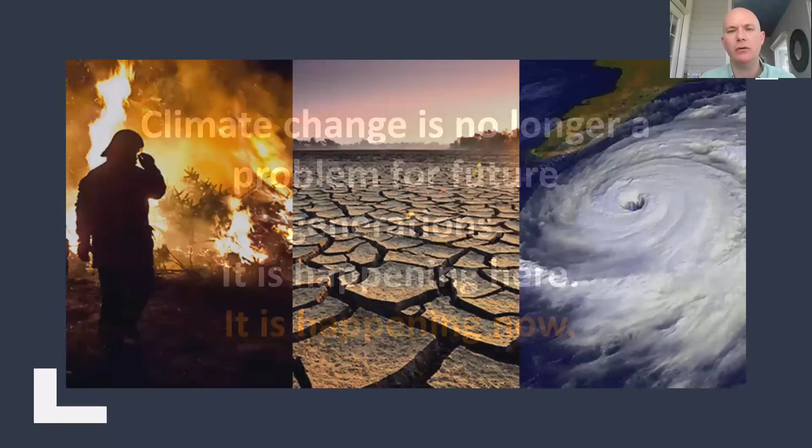This is really about addressing what we've seen as one of the emerging trends in the industry right now, in the built environment. For right now, I think we're going to start this conversation by focusing on setting out the problem. Strangely, as many of you might have felt the change in the United States or wherever you might be sitting right now, when I began giving a version of this conversation a couple years ago, there was a lot more need to spend time talking about what's really going on with climate change right now. I think you can pretty clearly see from your anecdotal interactions with other folks that the question of if has changed tremendously.

There may still be holdouts talking about the why and how things are changing. But where I think that has really changed in terms of the conversation around climate change is it has moved to a personal place. It's one thing to be talking about parts per million, and I certainly would be remiss if I didn't bring in a graph that talked about that here in just a moment as well. But where this has really changed is that the conversation around climate has moved away from statistics and has started meeting people where they live.

I think that's what we're seeing when we consider the effects of climate change in the forest fires we're seeing out west, because there's extra fuel load from pine beetles not being killed off, and it's claiming many trees out there that just add to the severity of those kinds of situations. The droughts that in many ways helped to spur the conflict in Syria, exacerbating poverty and concentrating people in cities and growing very restless over their circumstances in those situations once again.

I think it's really becoming pretty apparent from the level of tropical weather that we're encountering even here in the Southeast, that more than 50% of the recorded Category 5 hurricanes have happened in the last 30 years. That starts to give us a little bit more of it, then I think even regular folks are starting to recognize that something is different, something has changed.

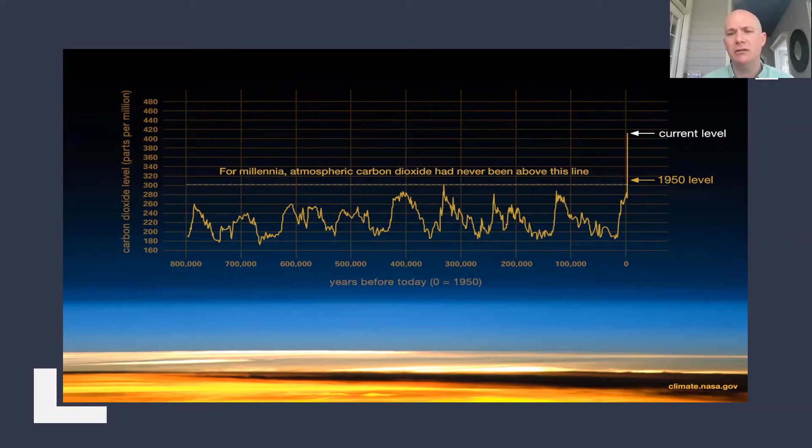We are truly in uncharted waters with regards to the climate and its resiliency. Certainly something to take a moment with to think about there.

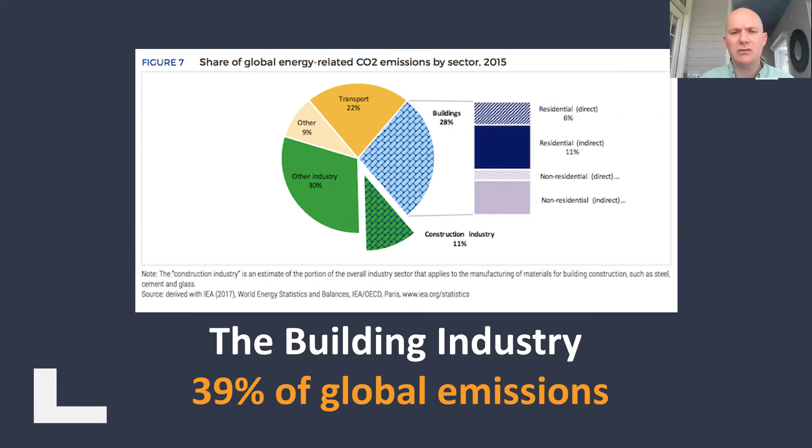So in reality, if you were to start in a place to truly look at the biggest opportunities, the lowest hanging fruit for addressing climate change, the building industry is certainly still ripe for opportunity there. And you kind of want to take a moment to ask the why of this.

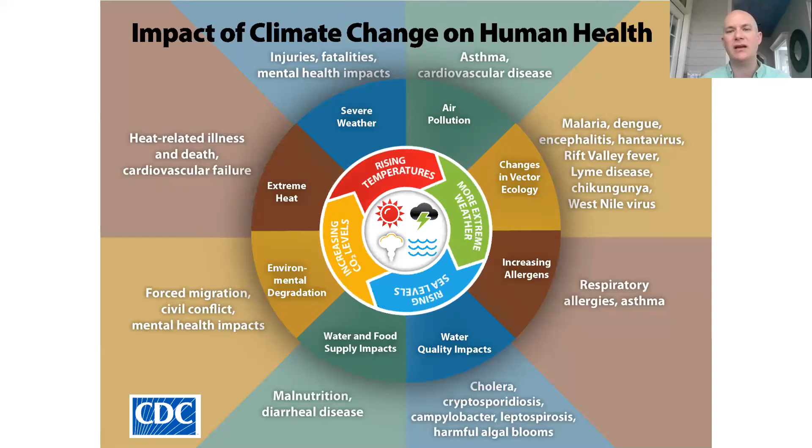As we address the elements within the building industry, I think it's important to break this down. Many of you probably have a great concept of this already, but it's important to remember that operational carbon is, for folks who use this parlance, your scope 1 and scope 2, the direct use of energy that a structure, a building, a car, or a hairdryer, anything that plugs in, the amount of carbon related to its use of energy.

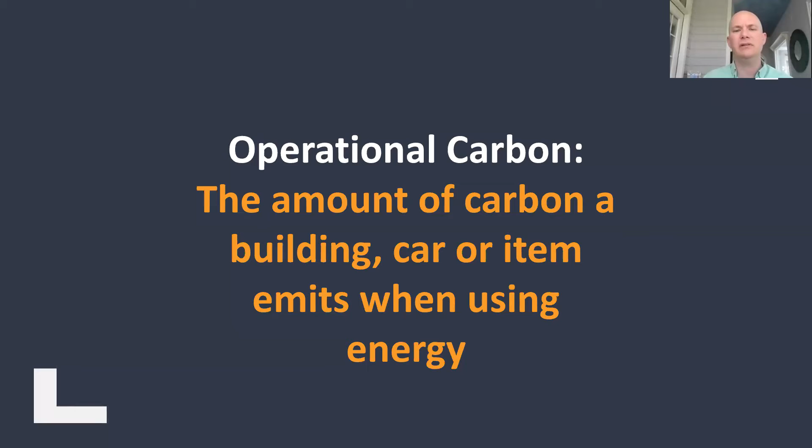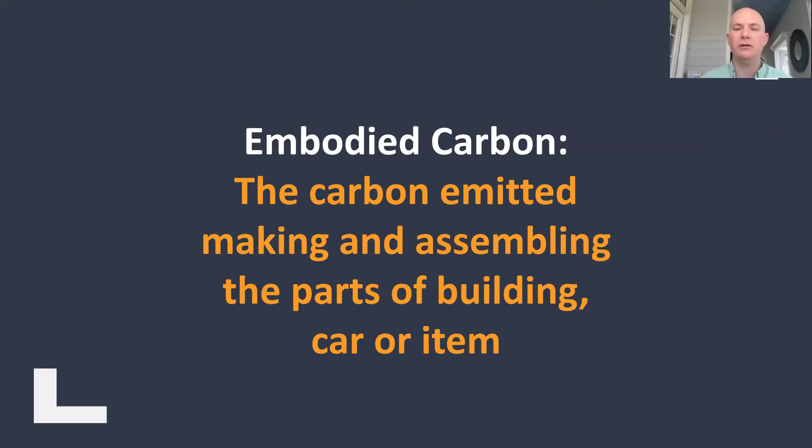That's operational. But embodied carbon is the carbon emitted while making, assembling that building, assembling that car at a factory, or crafting your phone or something along those lines. An amount of energy was used, and some of that energy likely used a carbon-burning source to create it. So those items have energy associated with climate change built into them. That's our concept of embodied carbon.

For a very long time, honestly, with the beginning of LEED, as many of you would be familiar, so much of it was focused on tracking emissions from building operations. And there's a good reason for that. It was the way we could measure change. It was the place we could go directly to users and owners of those structures and say, here's how we can do right for your wallet as well as for the environment by using less energy.

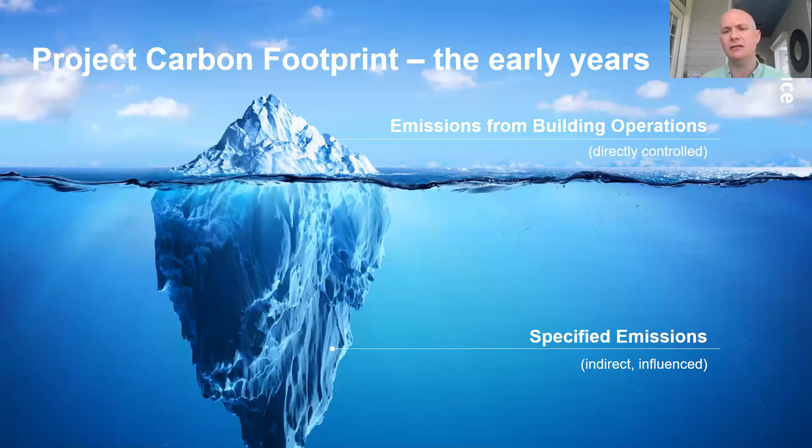While that is absolutely a valid way for us to consider efficiency, what is just now really starting to come to light is the iceberg analogy here—the specified emissions, indirectly influenced by what you're purchasing, and the emissions associated with making those materials.

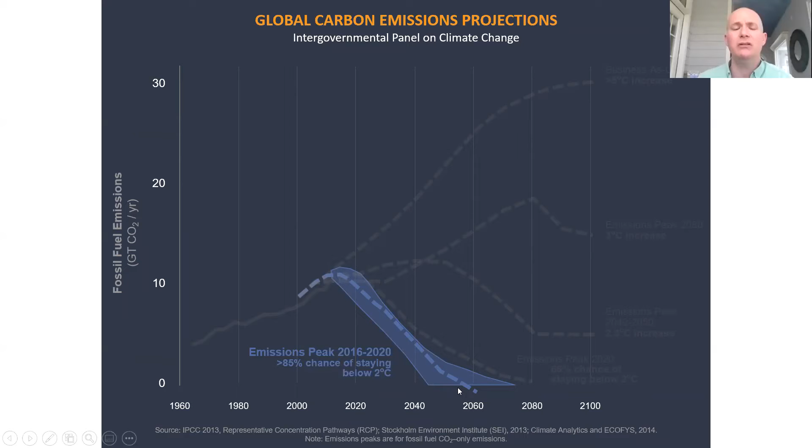As we go back and start thinking about these materials and embodied carbon as a solution to avoiding the worst effects of climate change, it highlights the path we're seeing here about peaking our emissions somewhere around now. Obviously we're past 2020, but if we're able to do it, we have a very good chance of avoiding the very worst influences and impacts of climate change.

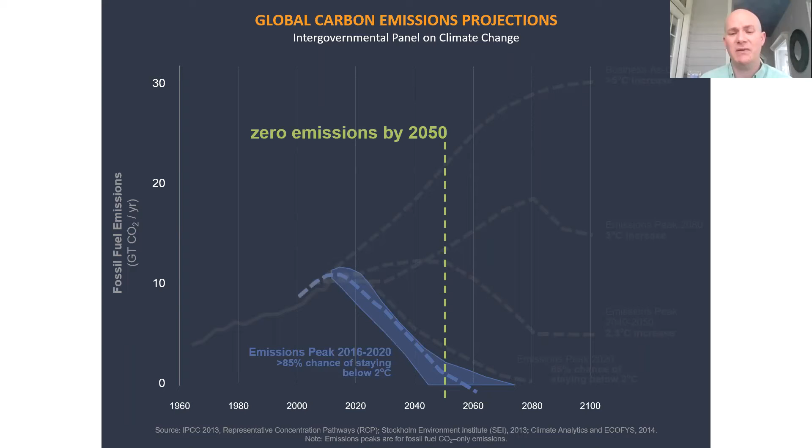What that really implies is essentially reaching a zero emissions target by 2050. There's an old saying that essentially says shoot for the moon and land amongst the stars even if you don't make it. But at the same time, the pursuit of a zero emissions target by 2050 ensures the best opportunity for our species, not to put too fine a point on it.

So with 2050 as our target for zero emissions, whether within the building industry or simply the aspects we can control, it really presents a window of opportunity. It's important to think about the building projections from the Paris Climate Accords and the levels of growth we can anticipate over the next 29 years—we're essentially going to be building 2 trillion square feet of new and renovated structures.

That's a lot—too much to really wrap our heads around. But this comparison helped bring it home for me: 2 trillion square feet represents essentially building New York, all 5 boroughs, once a month for the next 29 years. That is a lot of materials—a lot of concrete, a lot of steel, a lot of glass, a lot of carpet tile and other finishes you might find inside those spaces.

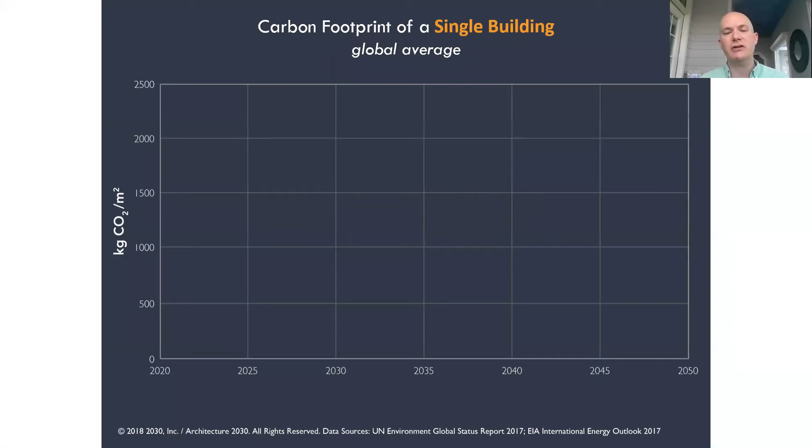So let's ask the question: what is the carbon footprint of that much stuff that we can anticipate being built between here and 2050? Taking a global average, you've essentially got your embodied carbon footprint—that's released in the very short period of time it takes to make that concrete, that steel, all the core and shell elements that go into building a building.

But from the operational standpoint, it starts at day zero and then proceeds from there. So you have one big burst of energy in your embodied carbon on the front end that you can never really get back. With operational carbon, there's always going to be an opportunity to further retrofit and improve efficiencies.

So when you're thinking about it, there is a case to be made for really focusing your efforts on embodied carbon, because once it's spent, if you're thinking about this from a carbon budget, you can't get it back. It's built into the equation. And when you total those up between 2020 and 2050, you're actually almost even in terms of where those two things break down in terms of your impact.

It's been very easy to measure this up until now, much more so. We're going to be introducing the tools that will help you measure what we can do to influence the embodied carbon footprint of your buildings as well.

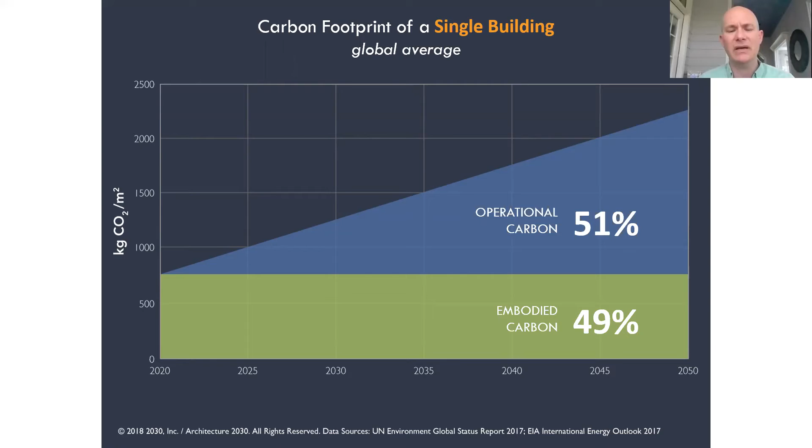Now, it's important to remember this is a global average, taking into account the developing world, perhaps the less stringent efficiency standards that they might be putting in place to make sure that they can achieve the growth and development targets that they need. But what happens when we're thinking about a Western, more developed country that has more opportunity for better code, better materials science, and making sure that our buildings and structures are more efficient?

Well, if we're using just as a rough cutout, the idea of 50% better operational practices, we are seeing immediately right then and there that the embodied carbon practice, if you're not measuring it, stays the same, bringing the operational carbon footprint down to 34% of the total emissions of that building, from the building and use phases between here and our kind of hard cutoff of 2050. So that gets us to a place where all of a sudden this embodied carbon piece becomes more and more important the better we get at operational carbon efficiencies.

Now, if you take a moment to think as well about master planning and the structures that are perhaps on the docket for another 15 years from now, it's not as though we're moving the period that we have to have the right amount of impact on moving things towards zero past 2050. That's still a hard cutoff date.

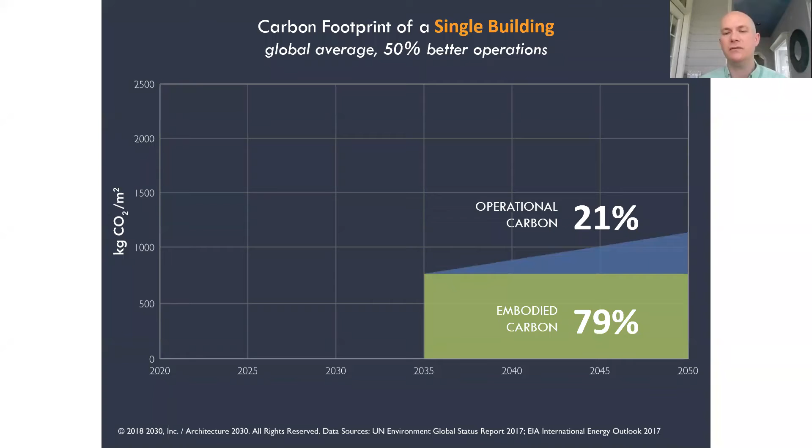So the import of making sure that this happens sooner than later only gets compressed as we realize that building the same building today as we would 15 years from now makes the importance of that embodied carbon footprint within that consideration that much more important, moving it to 79%. So the further we go every day, and you can even say every second that goes by as we move closer to 2050, makes embodied carbon all the more important.

And as we think about the kind of calculus equation that goes from all of the things that would be built today up until the building that's built on the 364th day of 2049, when you actually start totaling where the energy consumption for making those structures and operating those structures, it actually starts looking closer to 90% is going to be tied up in the building materials, the factories that make the concrete and the steel and the glazing and all of the other elements. Basically, did you melt a rock to make this kind of stuff that is so important to making buildings that last for a long time and are more considerate of their overall lifespan and usage?

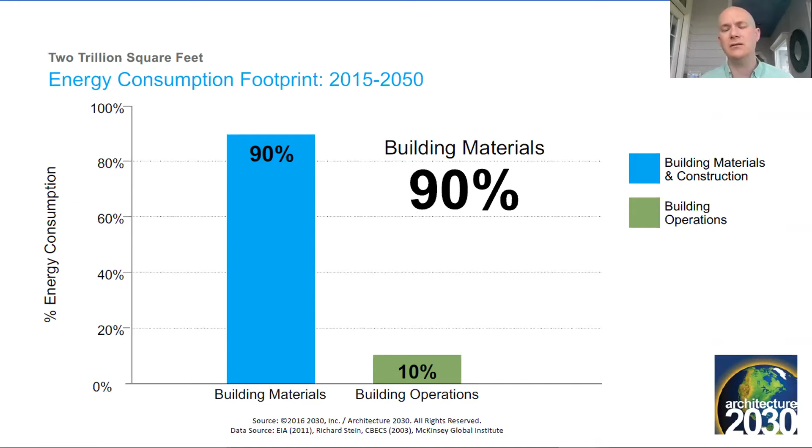That's where it's going. So that kind of brings us to the framing of the problem part of this conversation. Essentially, we're staring at about 29 years to avoid the worst elements of climate change. We need to be essentially getting to zero net carbon emissions. And in that case, we might be looking at buildings that have a 100 or maybe longer than 100-year lifespan.

But at the same time, we're only really going to be able to measure the operational efficiencies up until that kind of hard cutoff. It's not to say that it's game over. At that point, there's still an importance on that, but to avoid the worst of it from what we know at our best right now, the focus on being able to do something strong about embodied carbon sooner than later is very important. So that's getting to the idea of setting embodied and operational performance targets.

Balancing operational savings with associated embodied penalties is the idea here. If you go with the most efficient system that uses an extra 6 inches of concrete, that may not get you the benefit you're actually looking for when it comes to reducing climate change and the overall carbon footprint of our businesses and institutions, which we're starting to see written into policy now. The last element is that the sooner you get moving on it, the easier it will be to address. You have to take into consideration embodied carbon.

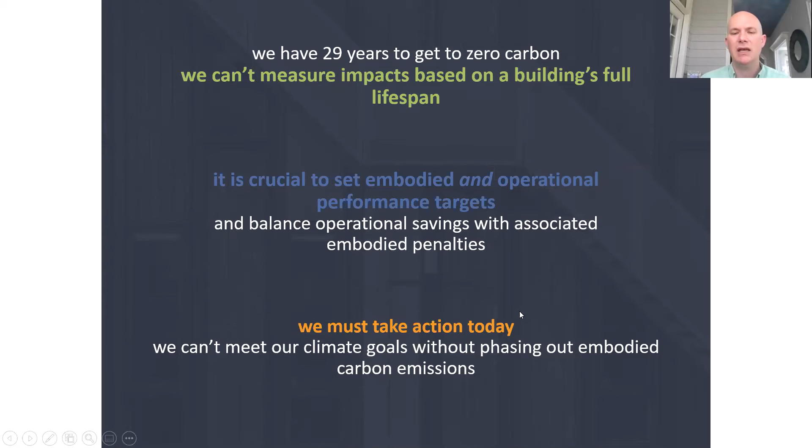Even if we got all of our buildings to zero footprint, which would be amazing, the world is still growing, we're still building new buildings, and those will have their associated footprints as well.

Lee, in his very gracious introduction, talked a little about our first mission at Interface, which we called Mission Zero. It was a course set forth in 1996 that by the year 2020, Interface would be a zero footprint business. It was my grandfather's audacious goal and dream.

He didn't live long enough to see it fulfilled, but I'm pleased to say that in 2019, we were able to fully say, on net—and admittedly we still have room to grow and find other ways to make our systems more efficient from a climate standpoint—but on net, with offsets across every bit of our business supply chain up and down, we reached zero footprint.

But it started leaving us with the question, as it became clear that we might be able to pull that off: what happens when you get to zero?

It raises the question, and I've often compared it to the Hippocratic Oath of Medicine, the first line of which is 'first, do no harm.' But it goes on further to talk about how you make someone better—it's about healing in that case.

In this situation, we've taken our first step to meet that goal of first, do no harm. But then what do you do from there? If we've compared Mission Zero to summiting the highest peak of challenge around industrial sustainability, well, do you just go plant a flag and sit on top of the mountain and say 'we're not jerks anymore'? I don't know that that's as visionary once you're there as it sounded back in the mid-90s.

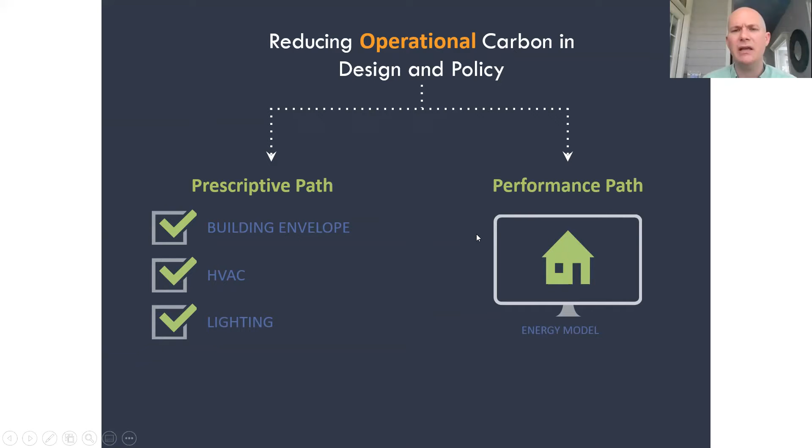With that in mind, how do we reduce embodied carbon, not just as a business with interfaces, the microcosm that's there, but for those of you who've been well versed in how to address operational carbon in your structures, there are two primary paths: a prescriptive path and a performance path.

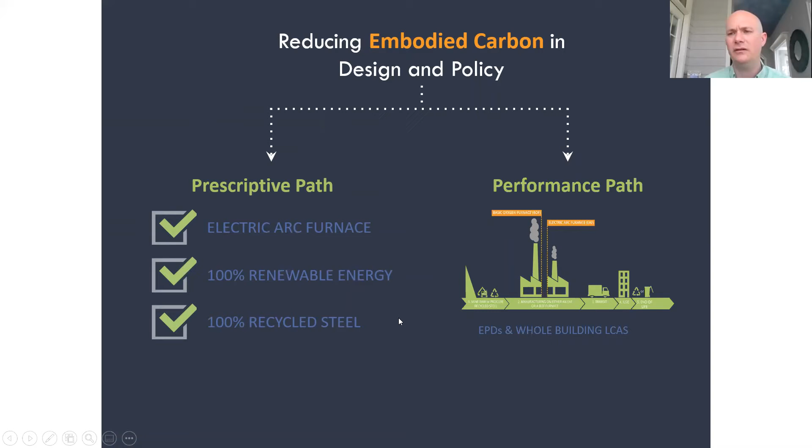We'll talk a little more about the performance path in depth here, and then on the other side is more of a checklist approach when you're evaluating materials. Hey, how did you source your energy for this? What system did you use to smelt that steel? Or how much recycled content is actually in there, therefore avoiding all of the extraction and refinement process that has already gone into making that material once.

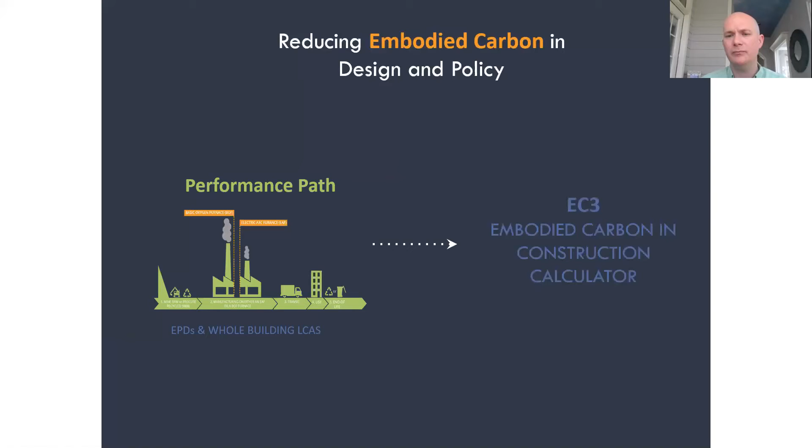When you're looking at the performance path, the tool I'm honestly far too excited about, from just being a building nerd, is what we call the Embodied Carbon in Construction Calculator. Some of you may be familiar with this one at buildingtransparency.org, but for those who aren't, this is 100% free — all you do is sign up to use it. It's a collection of all the carbon footprints of many of the major core and shell elements, and several interior finishes, that are readily available, drawn from publicly reported Environmental Product Declaration materials that say, for this unit of material, there is this much CO2 released to make it. All of this is publicly available, but up until very recently hadn't been collected, calculated, and put into an easily accessible, apples-to-apples side-by-side comparison — a tremendous tool that's opening up a lot of ways for us to make some of our most rapid and biggest steps in addressing embodied carbon in buildings.

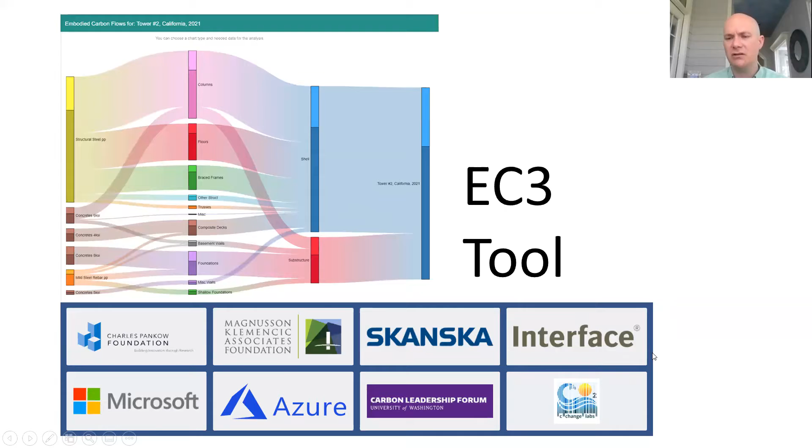What you're seeing is a bit of a breakdown of how that might go. It's really the brainchild of, believe it or not, Microsoft, who were asking the question — they have a new headquarters under construction and wanted to know what the footprint would be of the materials that went into it. The Carbon Leadership Forum at the University of Washington said, well, let's check and see. In the process, they looked and found these things that were kind of spread to the wind and brought them together. These are some of the funders who helped make that happen. We were fortunate to be involved with that, as well as Skanska from the construction side of things, and the C Change Labs were the folks who really designed and put it to work.

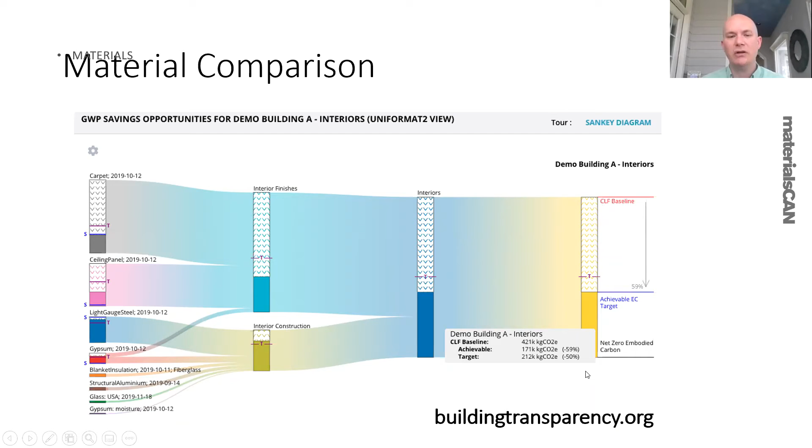What you're seeing, and we'll move quickly through this since it's kind of a wonky, almost terrifying-looking flow chart, is basically a breakdown of materials on the left-hand side, the different interior elements, whether finishes or construction, breaking down into the total interiors, and then you can look at the total project. From top to bottom represents the carbon footprint of all the materials used as a baseline. Anything with these negative arrows pointing down represents the achieved target between achievable materials and business-as-usual best case scenario, showing how far you can drive your carbon emissions down within that scope. So that's essentially what you're after — where all of those things get calculated into one place.

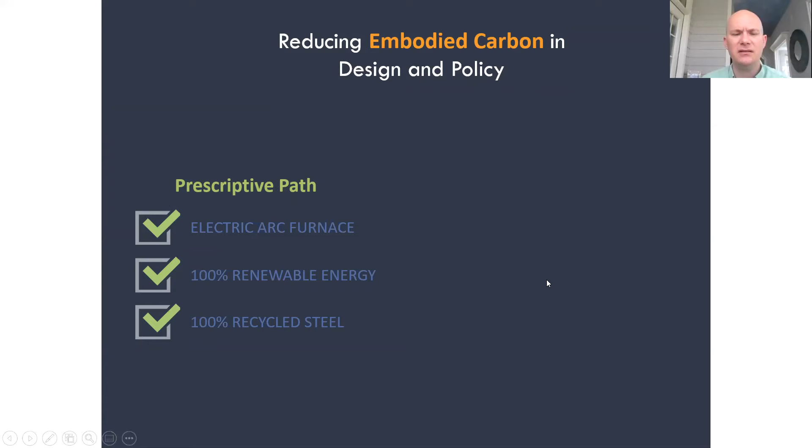When we think about it from the prescriptive path — embodied carbon, thinking about, hey, if we do this, this, and this, it'll help. It won't necessarily quantify it quite as cleanly, but it can certainly point us in the right direction. There is the Carbon Smart Materials Palette. Now, from a commercial standpoint, some of these elements will certainly be very appropriate.

And it really calls out what can be some of the highest impact materials for where you might use them. Concrete and steel, as I said, did you melt a rock to make this thing? Oftentimes will be your biggest components, and we'll see that in the project example we'll look at in a moment.

Many of you are probably starting to hear a bit about cross laminated timber structures, and the fact that we can build mid-rise buildings out of those by simply being smarter about how we utilize wood, locking it up in a way that it won't encounter the atmosphere in a 100 to 200-year-old building, using a material that is rapidly renewable on a geologic scale. Some really exciting materials there.

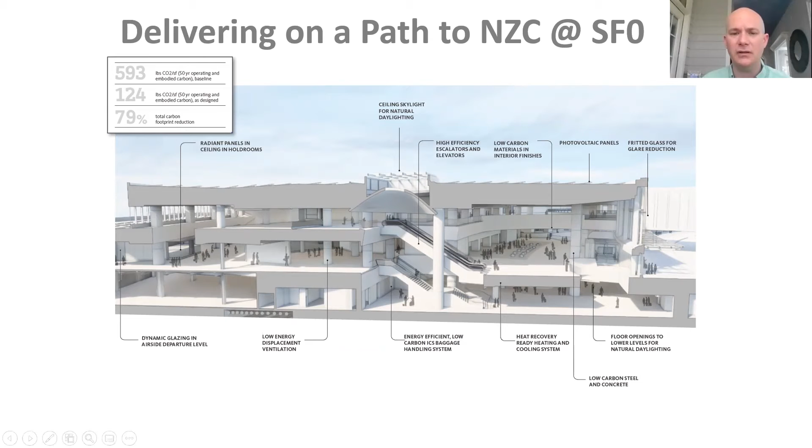And you can see it here that really your biggest opportunities in any of your projects you might encounter are really focusing on your steel and your concrete reductions. What you're getting as you get into the smaller elements of the total composition kind of takes you there.

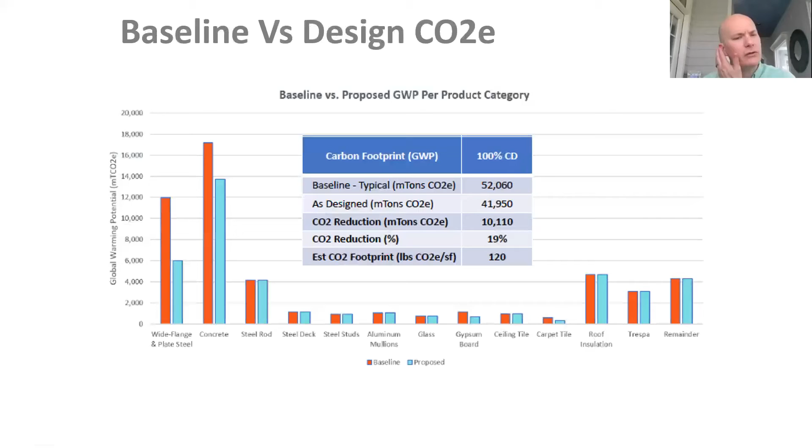And what you ended up seeing was all of the different pieces that go into it. I'm happy to say that carpet tile here still was able to cut that in half. So this was something that Gensler worked closely with them to generate and go from there. But it's important to remember that that's not just going to be on your 100, 200, $300 million plus projects where you can have real impact.

And essentially this represents the carbon footprint of a 20,000 square foot tenant fit out real estate transaction, somebody has to get a new space for their new office, and these are all of the elements that would typically go into them.

So for a baseline, they picked a project before there was any way to really effectively calculate the carbon footprint of that relatively small, maybe a couple million dollars worth of work that was done, and pulled it off the shelf and said, well, okay, that's what we did. Here's where it stacks up using this EC3 tool calculator.

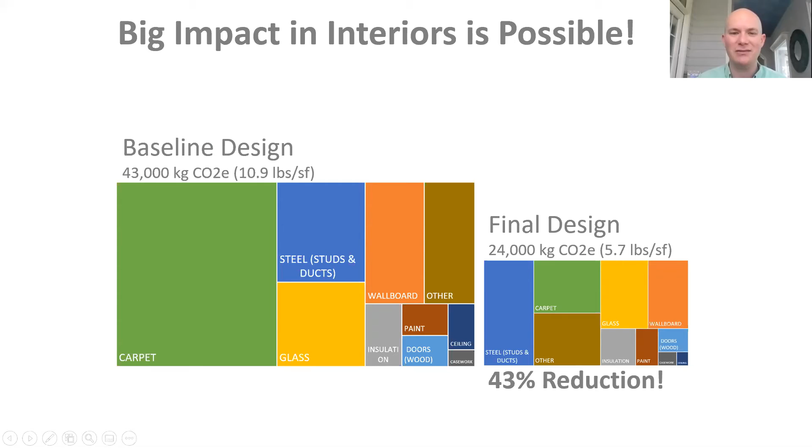Gets us to a place where essentially, if you have an administration that isn't particularly interested in this, you can say, well, it costs the same, and then say, oh, by the way, you can go and tell your students you just saved 43% on your interiors package. And you can take credit for that, even if it's not an interest to them. It's kind of almost this covert sustainability that can take place with that, which I think is really kind of fun. And I know many of you are probably well versed in achieving that kind of goal as well.

And what I would recommend is that you're not going to run into any conflicts if you simply drew a line down the middle of this graph and said, we're not playing on the right-hand side of this. 50%, you have to be in the lower 50% to consider using your product, whether it's on our campus or in our company or that kind of thing.

When that kind of information is available, the first thing that a rep like me from one of these competitor companies might be saying, if they find out from you that, I'm sorry, you're no longer in consideration, you don't offer a product with a low enough embodied carbon footprint, that person is on the phone before they're back to their car or before they're even hung up on your Zoom call, having that conversation with their manager saying, I just lost a job or an account to something I'd never heard before called embodied carbon.

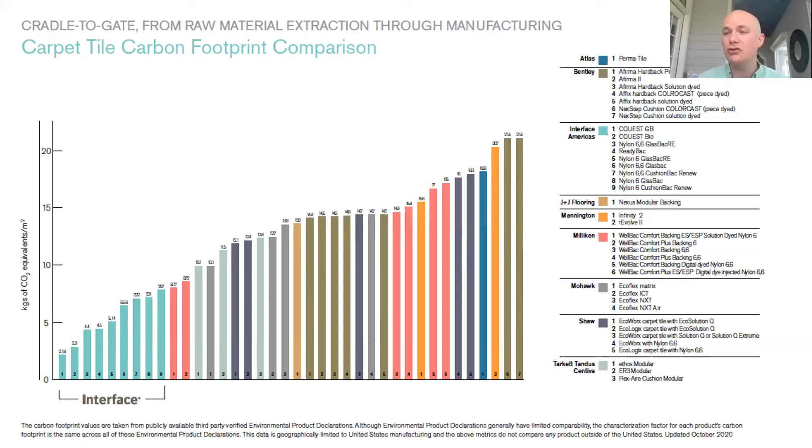That's the level of influence you potentially have by saying, this is how we're going to choose to spend our dollars. Peeking behind the curtain a bit at what we've done at Interface, not to brag, but to show what a dirty industry like carpet or flooring can potentially achieve. We've done testing on our first iteration of a 12-ounce carpet tile to show it's perfectly commercially viable by adding density with a tight weave of the face fiber.

What you're seeing on the left-hand side of the graph is our first combination of face fiber and backing materials that allow us to go carbon negative. It breaks the cycle of tying consumption to carbon emissions. Essentially, you buy more of this formulation from Interface or any other manufacturer that breaks this barrier, and your building is no longer contributing to climate change. Your building, or at least that part of the trade, is offering a solution. You buy more stuff, less carbon in the atmosphere. That feels like a violation of the laws of thermodynamics.

It felt that way when we set out on this journey too. But to me, it's a fascinating approach that shows we're getting closer to the systems that provide abundance in nature to multitudes of organisms, while at every exchange pulling down carbon and creating a less toxic atmosphere for our species and the biosphere as a whole. Really neat stuff there.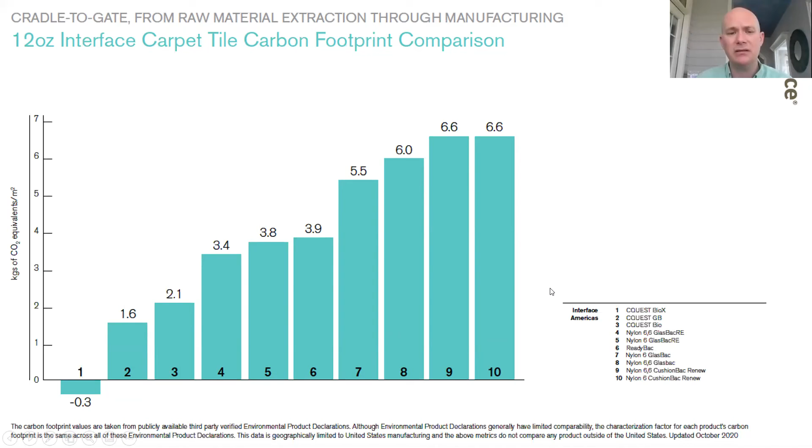As I said, all that we make, everything we offer as a product, is zero carbon footprint, but we're starting to get to the point where we can offer carbon negative products. We launched that first one in 2020, which was really the inflection point between Mission Zero and Climate Take Back. For us, it represents a really exciting new time.

I'm happy to say that last slide is actually slightly out of date, in that we've found one of our suppliers has come up with a new formulation with even higher recycled content and lower carbon footprint in the nylon. The more recycled content in the nylon, the lower the footprint, so we can use more of it in getting to that 18 to 20 ounce, more standard carpet tile construction. It's very affordable to use these materials on whatever your next project might be, to say that's a carbon negative floor.

A little breakdown on how that actually works. The tufting of a carpet tile, what we call the pre-coat, and then the two layers of backing with the backbone that gives it its shape. You don't want carpet tile changing, but essentially we have a bit of a carbon footprint still associated with the face fiber.

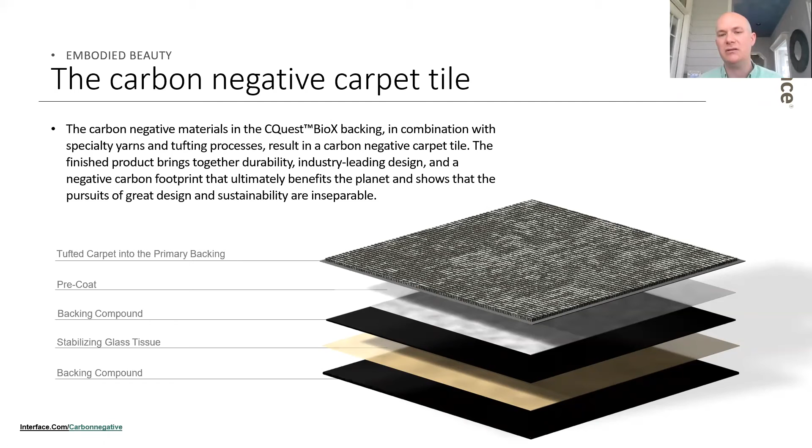By using a high concentration of bioresins, essentially plastics that don't go through the 'let's rot in the ground for a few thousand millennia to turn into an oil-based product' process, we're sourcing from things that are rapidly renewable, in the form of resins and concentrated carbon fillers that can come from non-agricultural plant waste products. We're making our materials out of plants much more effectively than we were even 5 years before. That gives us the opportunity to once again capture more carbon, store it in a place that won't become an atmospheric challenge, and lock it up somewhere infinitely recyclable, as our system has been designed to do for 20 plus years.

Not just to talk about it, here's an example of one of those carbon negative products. We call it Zen Stitch. It was launched in our Embodied Beauty collection about 5 months ago. It's one thing to say you need to make a sacrifice from an aesthetic standpoint to put this on your floor because it's the right thing to do. It's quite another to make it a beautiful, perfectly usable product that people will say is really slick. And by the way, you're helping address climate change with this product by pulling down and storing the CO2 in the backing. For those of you in public institutions, if you don't spec it, you won't get it.

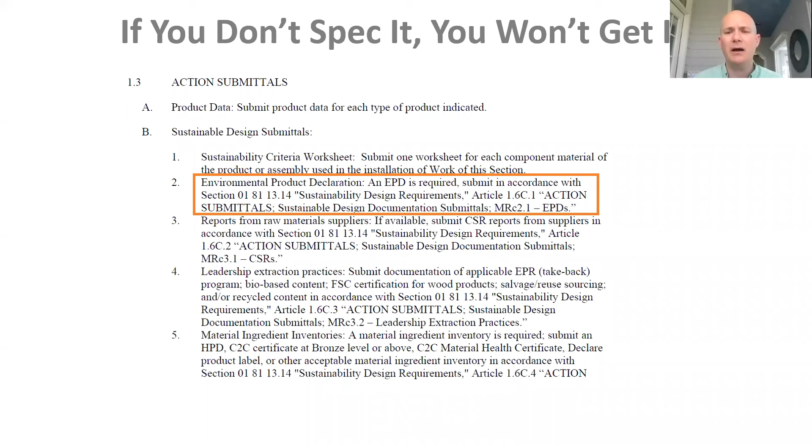There is nothing proprietary about the carbon footprint of a material. You can design around those, using EPDs in the same way we have, by setting limits or brackets on prioritizing materials that use low carbon footprints really effectively.

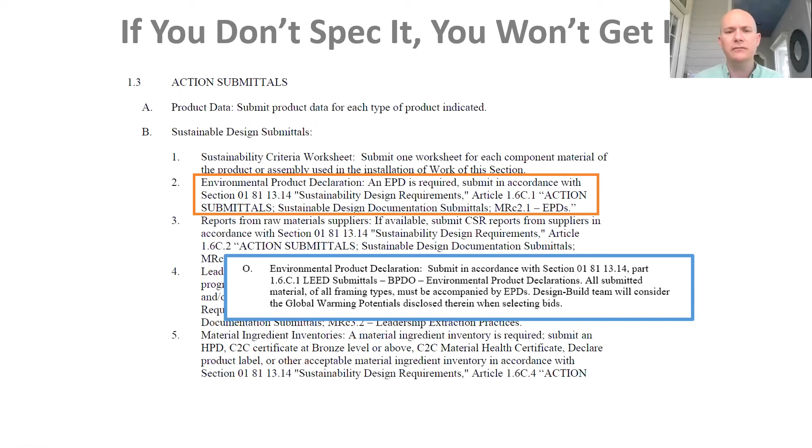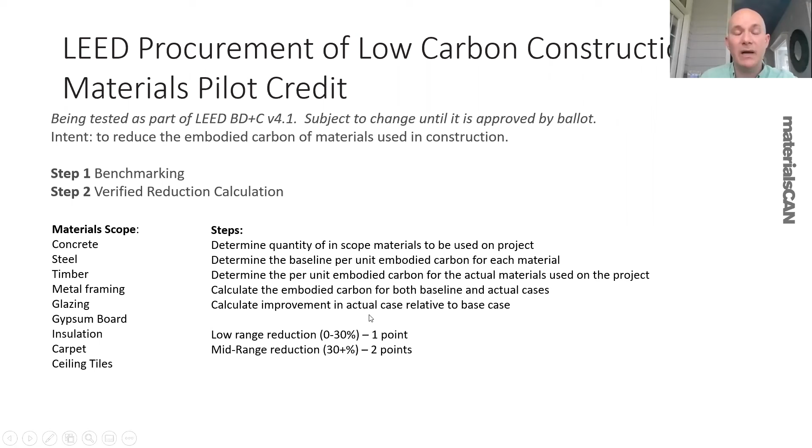LEED is offering pilot credits for these as well, for projects you may be pursuing that have LEED certification. The main materials typically tied to the EC3 are often the biggest movers of carbon. On the materials scope shown here, you can receive a few pilot credits, one or two, depending on how much you end up using those materials.

For a little more information on where you might find this, The New Carbon Architecture by Bruce King is a great resource.

Digging further into the Materials Carbon Action Network, these are suppliers who have solutions for much of what you want to find if you're prioritizing low carbon materials, to address that big chunk of carbon released in the process of manufacturing the elements and components and materials of a building. These people will have solutions for you there.

I like to end on the idea of bringing this once again back to people. I love this quote from Desmond Tutu: that people of conscience need to break their ties with corporations financing the injustice of climate change.

I'd like to leave you with this thought: as a consumer, I'd like to believe that most of us try to do our very best to make good choices that don't harm others indirectly or directly through how we spend our earnings.

But for those of you in a position to specify or influence how a building project proceeds, think about voting with your dollars. Someone might anticipate earning somewhere between 2 to 3 million dollars in their entire working career. Think of that as 2 to 3 million votes for good materials, average materials, or bad materials, that's a really important way you can influence things from an economic standpoint.